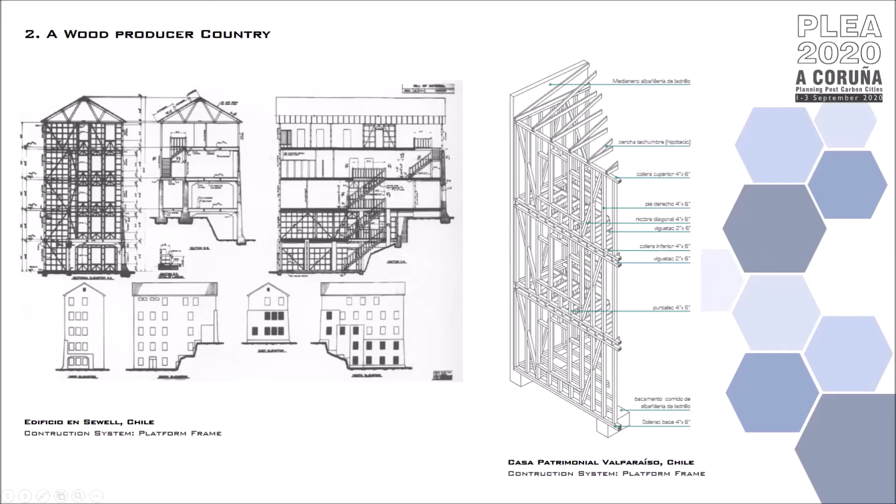The definition of the construction system to be developed for this research is defined in relation to the revised precedents. Innovation is addressed through flexibility and adaptability of home spaces based on the life cycle of families.

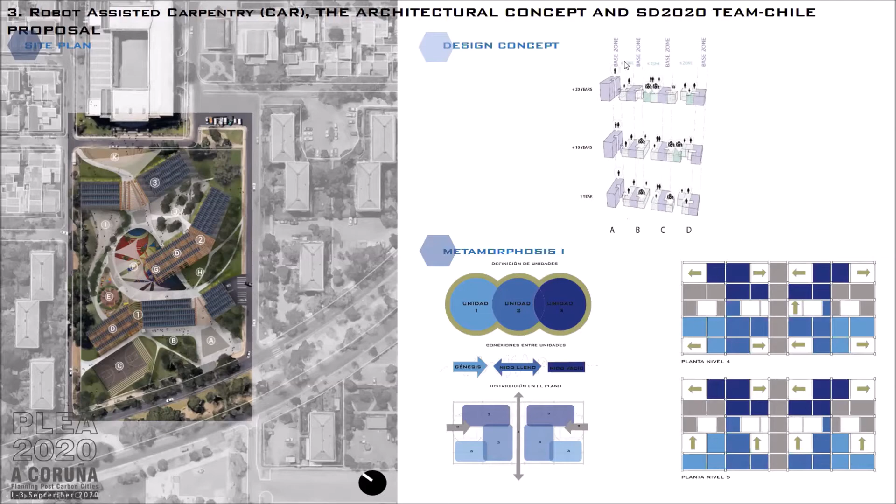The Metamorphosis building is defined with an orthogonal structural system with a ground level of reinforced concrete to isolate the wooden structure. The two systems are connected through seismic isolators to separate the movements of the two structural systems, maintaining the common load transmission lines.

The post and beam construction system is robot-machined with timber joinery fixed with steel pins, modular every two stories and assembled by a platform system between the third and fourth floor. Finally, the primary structure is completed with CLT slabs, precast and dimensioned in medium sections for horizontal closing of the laminated timber framework.

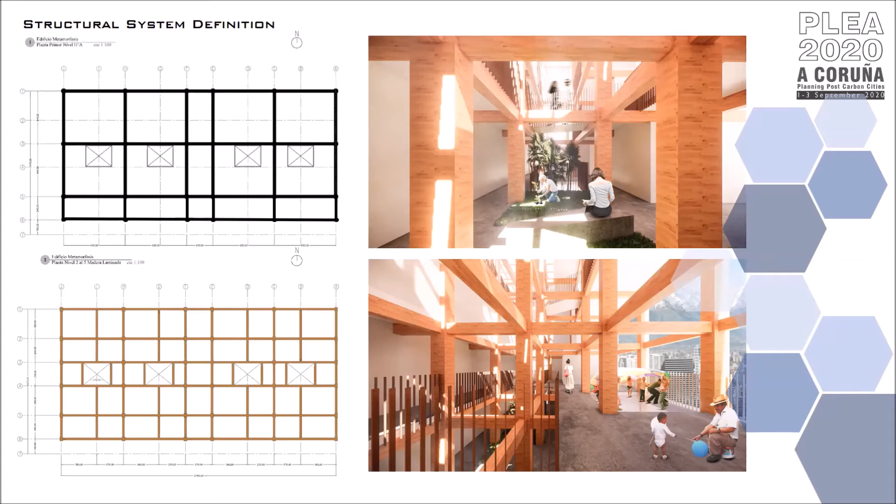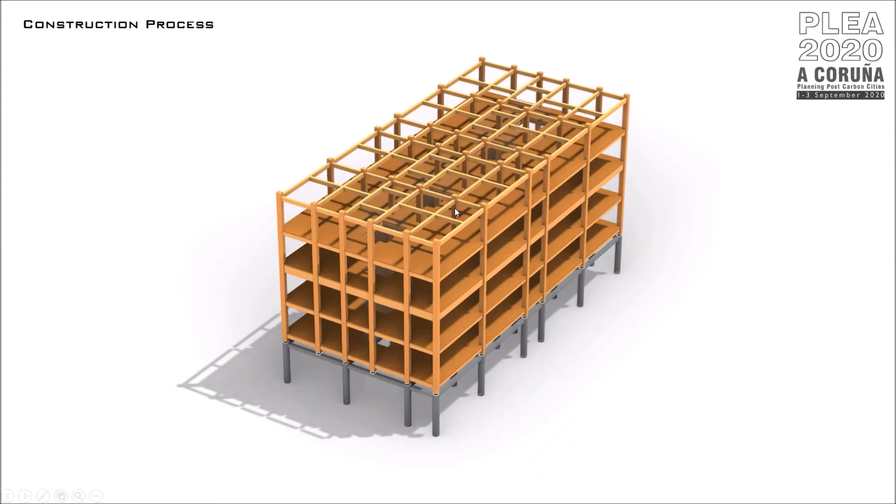The wooden structure is made of glued laminated posts and beams frame of 15 by 28 meters engraved in a mesh that allows the spatial operations and variations. It is industrially manufactured and assembled through parametric design by robot-assisted carpentry. Home spaces are distributed according to operations with the greatest possible flexibility. Humid zones, facilities, and general circulation are kept fixed on the vertical volumetric bands.

The prototype for Solar Decathlon 2020 USA is a two-story high housing unit of the Metamorphosis building located at the edge of it. The structure was made of certified Douglas fir wood, provided by a local sawmill from southern Chile. Then, the dimensions needed to be adjusted: 185 by 185 millimeters for the shorter beams, and 185 by 360 for the longer posts and beams. The total amount of wood used was 11.85 cubic meters.

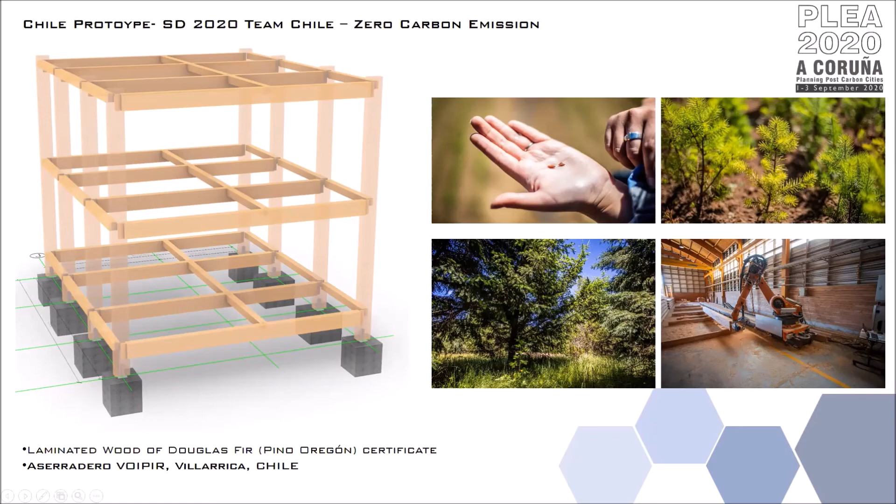This redesign produced new technical details and structural calculations that modified the load lines and changed the load directions of the posts and beams, inverting the load lines of the original frames. For the robot machine process, a prefabrication of 24 tenons in 12 beams and 24 mortises in 8 posts. These junctions build up four primary structure transversal frames.

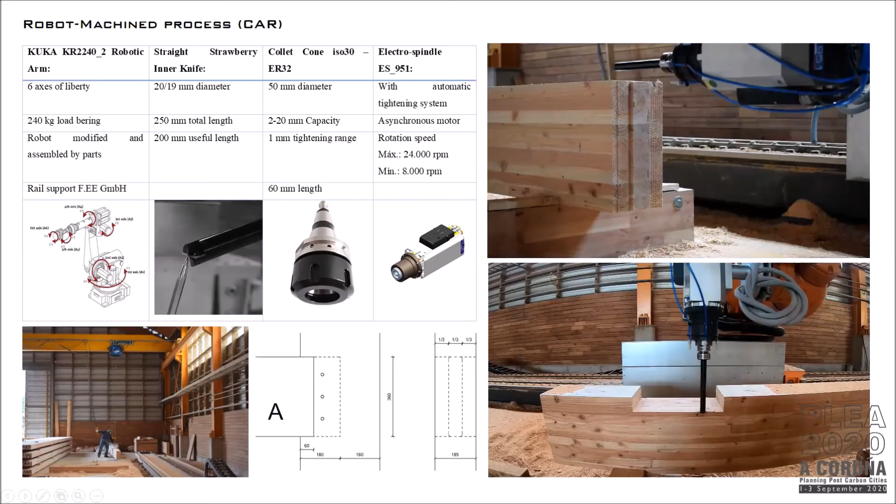After the robot machine process was done, a comparison analysis of the prefabrication and materials of the structure of the Casa Feni 2.0 prototype with other construction materials was carried out, comparing and evaluating the life cycle and span of the prototype.